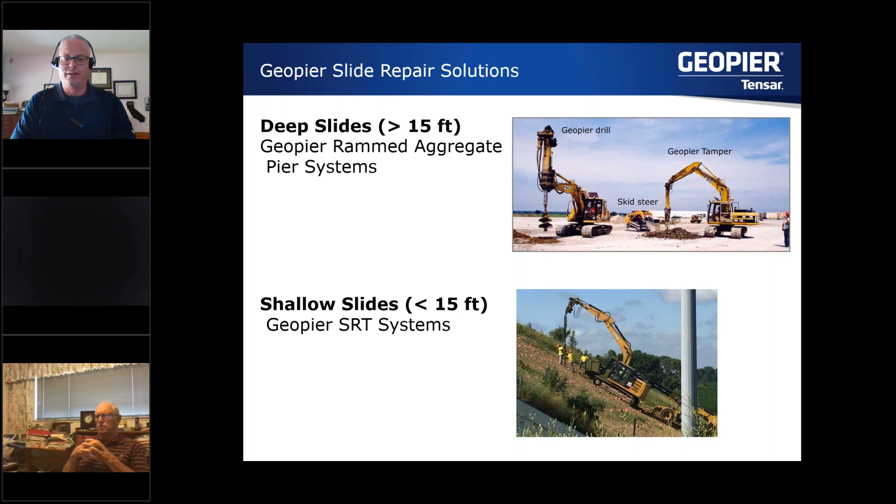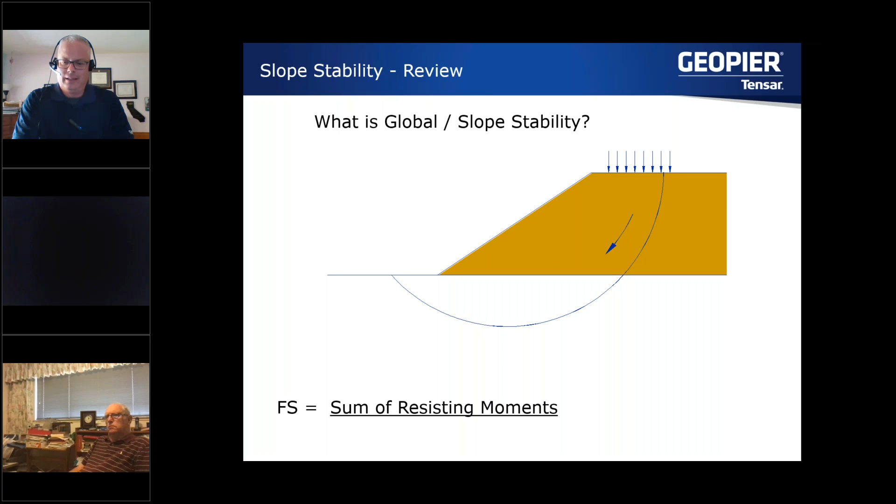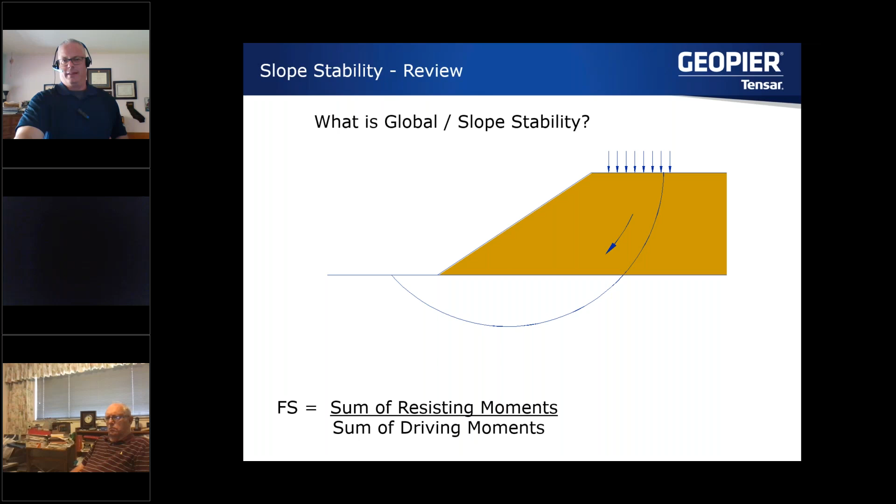So let's start with the conventional RAP technology for slope improvement. Just a refresher for those of you not practicing in geotech, what is global or slope stability? We have some driving forces driving the slope down in a deep-seated or global instability. The resisting moments divided by the driving moments is what is defined as the factor of safety of slope stability. Excuse me, I had that reversed initially, but this is the general concept and the problem.

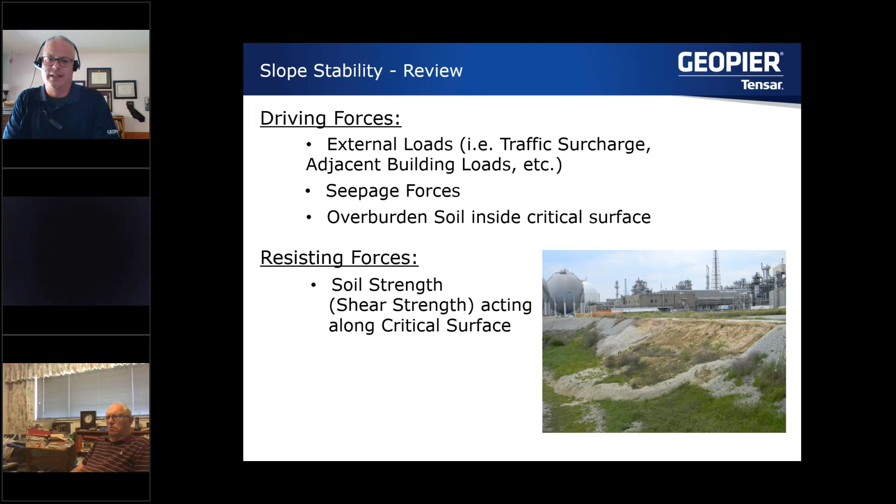So driving forces can be external load, surcharges to the top of a slope, seepage forces with water, overburden soil inside the critical surface. So the driving forces are the slices on the top side of the slope pushing down on the resisting slices of soil on the bottom side of the slope. And for resistance, unless you have some kind of mechanical connection, say a tieback wall or some connection to the other side of the sliding surface, it's simply the shear strength of the soils on the resisting side, the toe of the slope.

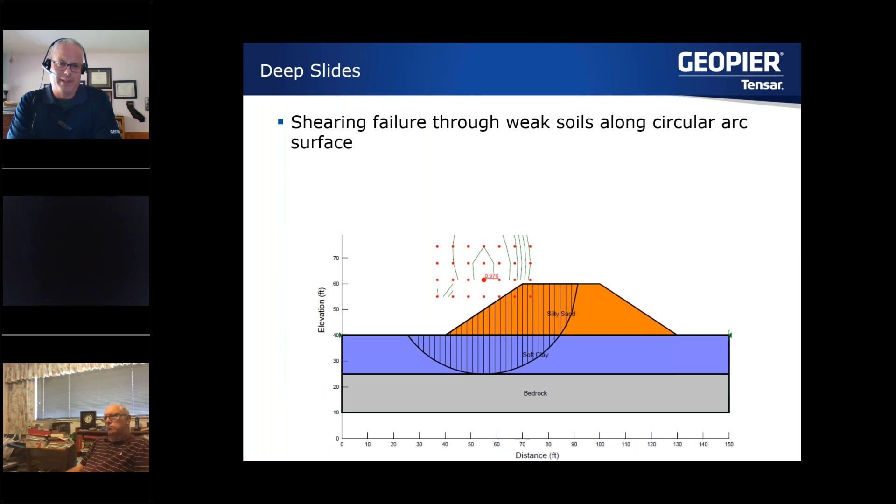So this is a typical SLOPE/W model, what it might look like. Shearing failure, you see the slices there I mentioned. On the right side would be the driving side, the resisting side on the left. And if we put in a rammed aggregate pier, the RAP area at the toe of the slope to help resist the slices from above from sliding down, this is what the model would look like.

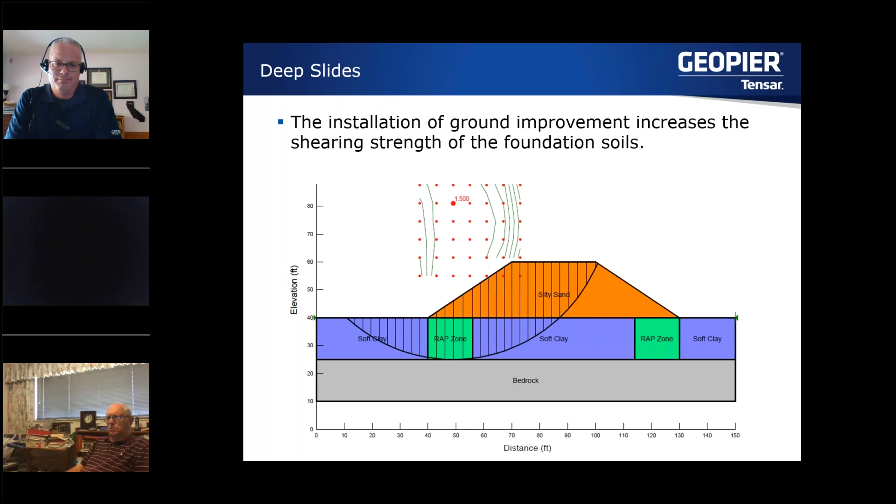So by putting the RAPs in, we're increasing that shear strength and creating a composite shear strength. The rammed aggregate piers would typically have a phi value of 50 degrees and a 0 cohesion intercept. Again, for the non-geotechs, there are two types of strength parameters typically that we look at for slope stability projects: the phi angle of the soil, which is the internal friction angle, and the cohesion, which is how sticky that soil is. So you add those together and you get your composite envelope.

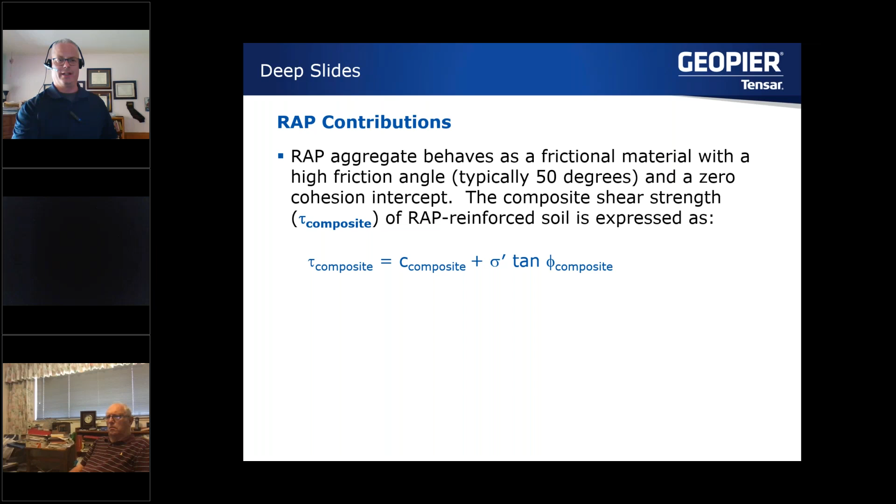So say this is a constructed embankment with some soft foundation soils, we can come in and put our piers in if the modeling shows that the factor of safety is insufficient. So really this becomes a weighted average of the matrix soils of the foundation material and the strength of the RAPs. What's important to understand here is R sub A, which is the area replacement ratio. It's basically just the percent area of the piers compared to the whole system, the piers divided by the footprint of the sliding area.

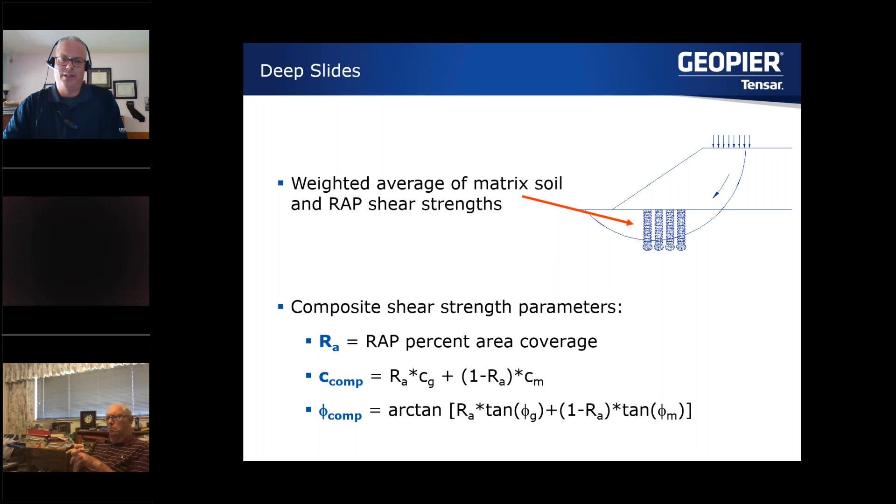And then we're going to look at the composite C, the cohesion we talked about, and just take the area replacement ratio and take the weighted average. Same thing for the phi angle. So for an example here, if we took an area replacement ratio of say 20%, that means of all the area that we're supporting in the RAP zone in the model, 20% of that in plan view is going to be a rammed aggregate pier.

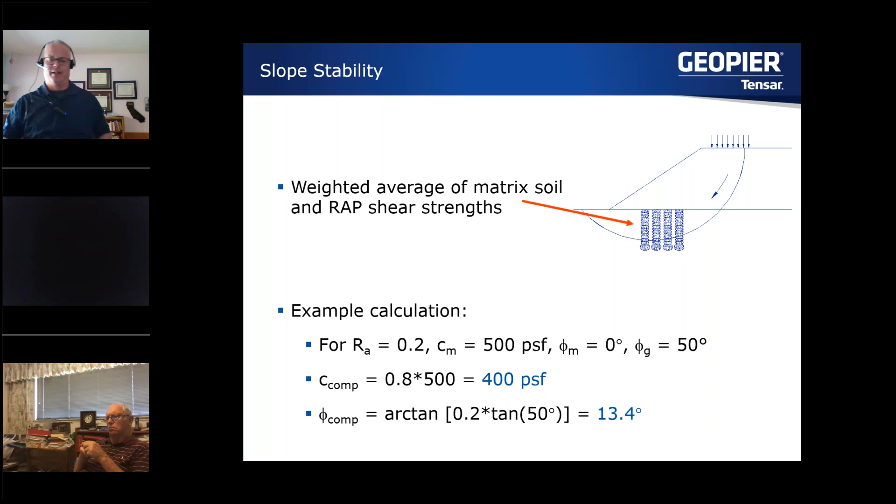The matrix soil, C sub M, is 500 PSF. And let's say the phi angle of the clay is 0, and the phi angle, as said before, is 50 degrees for the Geopier. Taking that, the composite cohesion is going to drop down a little bit, but we're going to pump up the phi angle to 13.4 from 0. And that's a huge benefit, for those of you that have run models out there, I think you would agree. So that's going to stabilize the slope and increase the factor of safety.

But there's something else going on here: stress concentrations for the stiff rammed aggregate pier elements. So if we had a confining layer, a stiff layer or bedrock we were tying our piers into, in other words, the global stability would not, I guess a better way to put this, the critical slip plane in a soft soil that goes down 100 feet and our piers are say 30 feet, how we're going to be improving the factor of safety is pushing that slip plane deeper. So Mother Nature has a way of finding the path of least resistance.

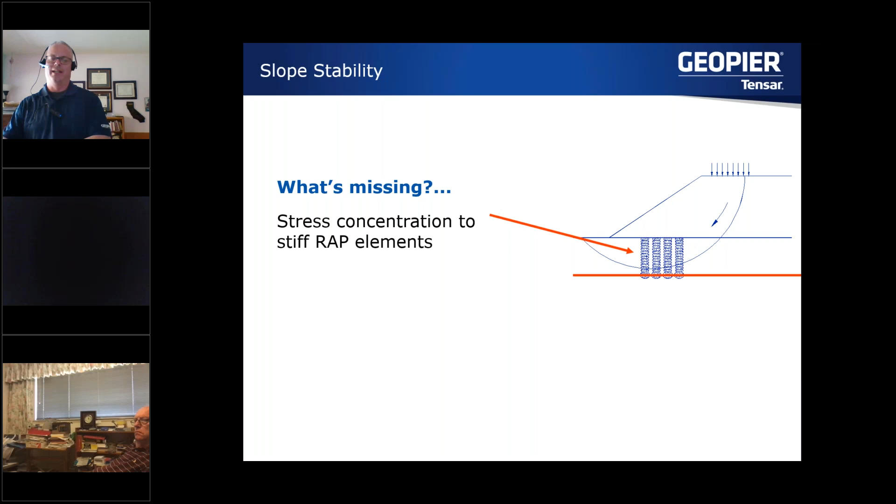Well, if we're confined by that and our piers can tie into a dense layer or bedrock, then what's going to happen is our structural engineering friends would tell us that stiffer elements tend to attract more stress. And that's exactly the concept that is happening here. So should this be our condition, we can actually account for that with an R sub S. Now that's the ratio of the stiffness of the pier to the soil.

Now for a completely rigid element, like in a rigid inclusion, conceivably the stiffness ratio is the ratio of the stiffness of the element to the stiffness of the matrix soil. But this is not that case. What we have here is a flexible condition, so really the R sub S values are limited to 1 to 5. Whereas if it were just the ratio of the element to the matrix soil, it would be anywhere from 10 to 40 or 10 to 50. So that's important. It requires a little engineering judgment, especially as it relates to the profile.

There's a lot of alphabet here, but the important thing to recognize is this is just a weighted average, as I said before, with the stiffness ratio weighted into each element. So just for an example, back to area replacement of 20% and R sub S value of 3, using the same matrix soils with no rammed aggregate pier at all, we're going to have a C of 500 and a phi of 0. That's not going to be the strongest slope. Neglecting stress concentrations, we're going to be at 400 and 13.4 as previously stated.

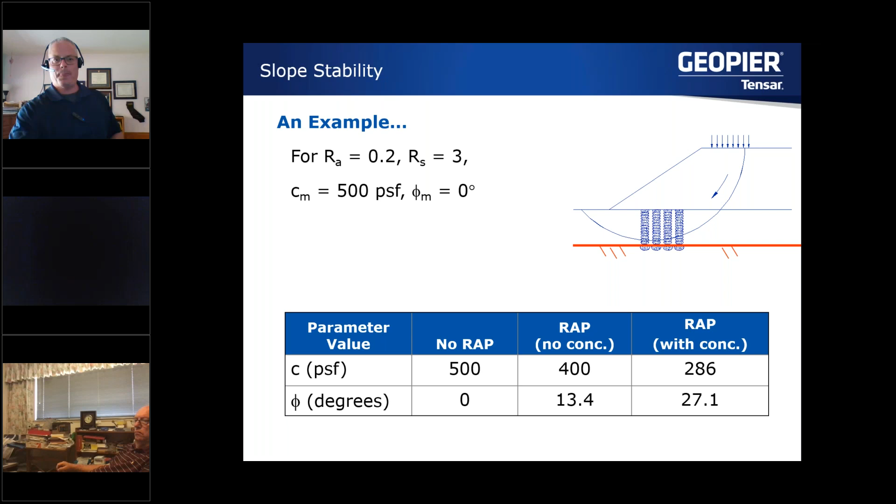So here's an example. How are we doing on time here? It looks like we're doing fine.

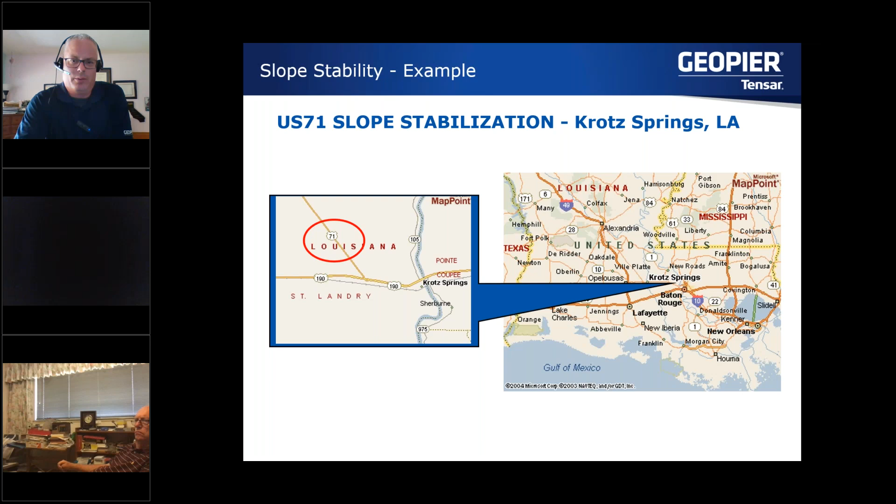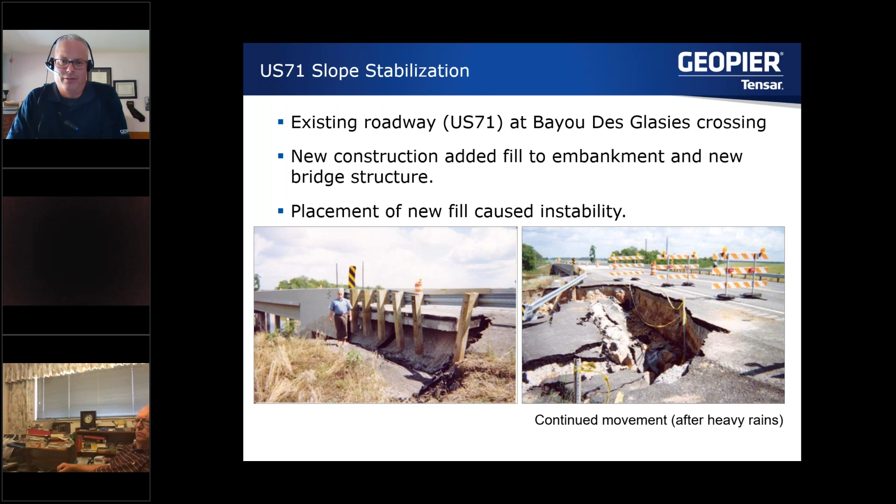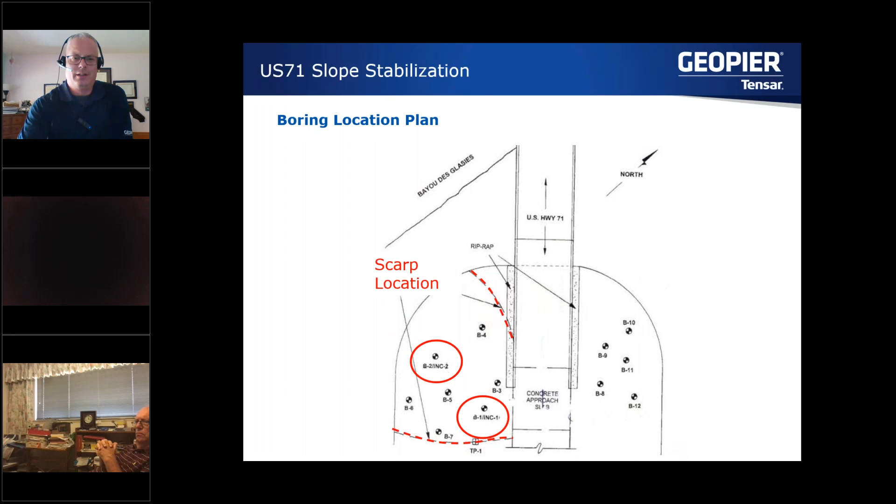In Louisiana, Krotz Springs, US 71 slope stabilization. Here's a project out in the bayou where they added some fill on an embankment, and it destabilized the slope as they decided to raise grade for this bridge crossing. Here's a look at where the slope was failing towards the watershed there. You can see where that scarp was intersecting the road as it degraded in the previous picture. And notice the 2 inclinometers there.

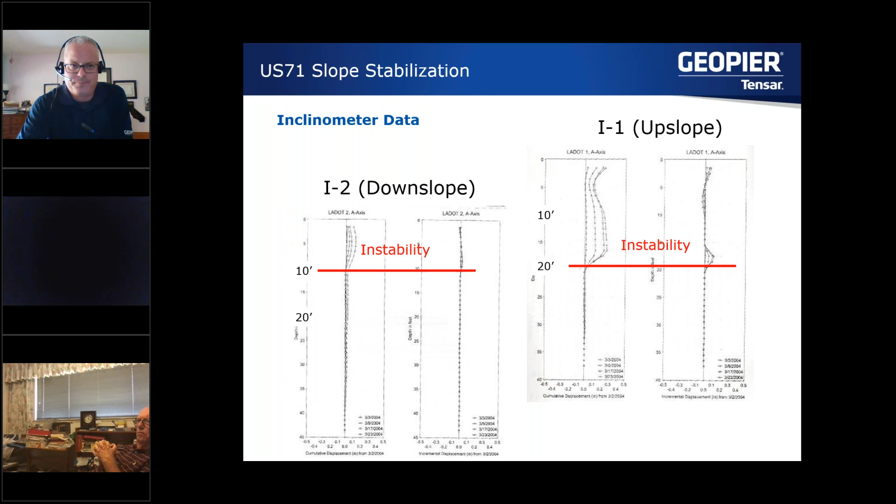So here's the borings, the profile. Let's see the clay fill they added, and the instability of the upslope and downslope. So a classic movement there. So like any slope stability problem, typically you're going to start with back calculating the strength parameters to get to a factor of safety of 1 if it's a failed slope or on the verge of failing. And that's what we did here, as you can see.

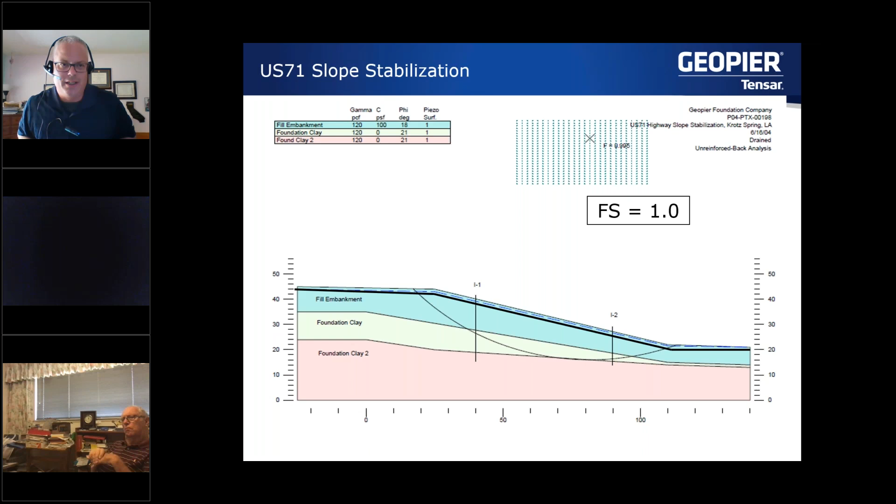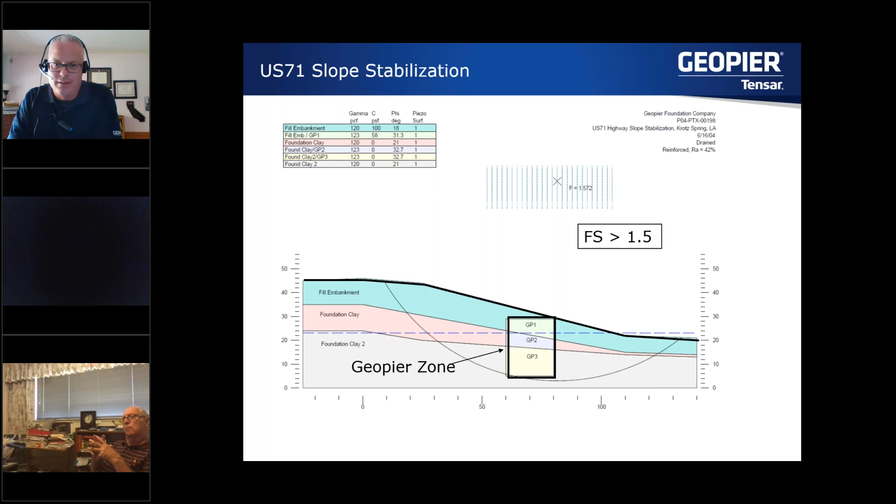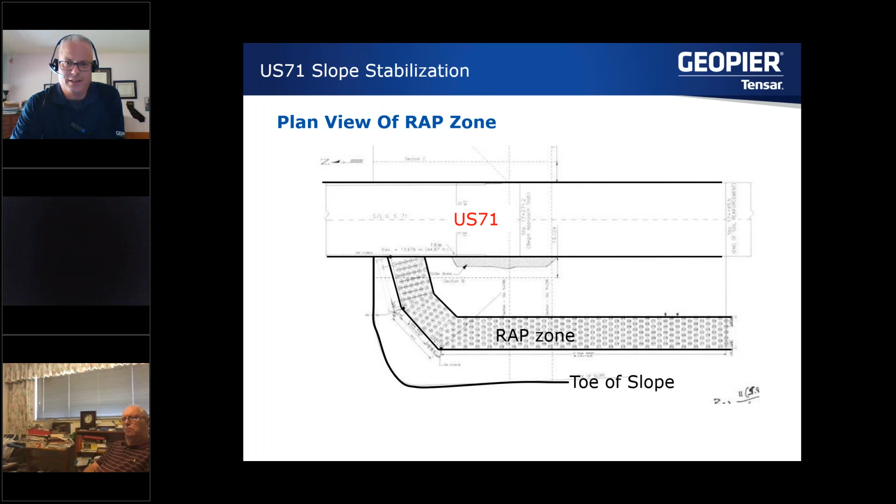So nothing new. And then we added the RAP area around the shoulder at the toe of that slope. And you can see the parameters up top using the formulas and the analysis we just went through, and we were able to bump this up to almost a 1.6, but greater than a 1.5. Here's what the plan looks like for all the RAPs that went in. You can see the toe of the slope there, the creek and the bridge. We just brought that around and increased the resisting moment of the system to increase that factor of safety.

And this is just a quick video here to help illustrate some of the technology that we used here.

But whoa, that's loud. Sorry about that. I don't know if I blasted everyone's ears.

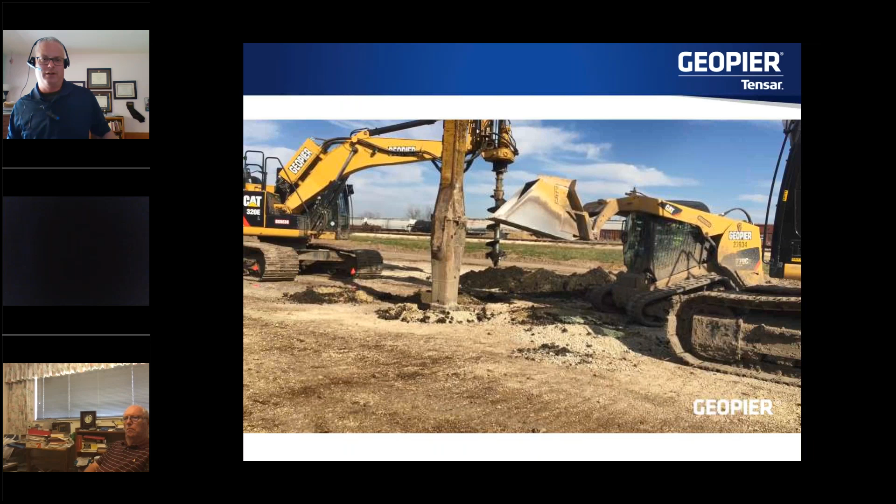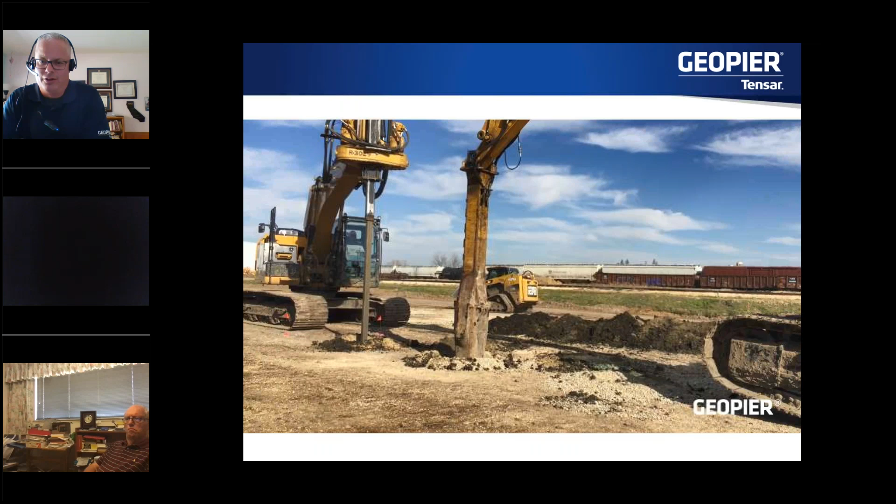This is showing just a classic drill and fill technique that we developed. We have a lot more tools than this for whatever application it is; settlement control is by far the main reason people use Geopiers. But for this talk, this is the technology used to increase the stiffness of the soils at the toe of the slope, and again, increasing those moments. You notice the excavator rolls back on its heel, and that's to get more reaction.

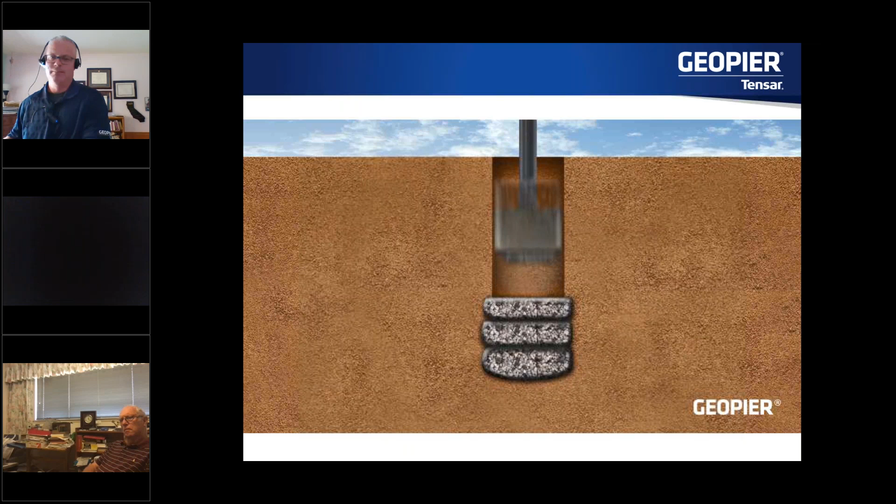But the concept is to extract soil from a hole here and put in different lifts. We're going to punch in a bottom bulb here to get a working platform, usually an open graded material in the bottom, and then well graded all the way up to directly beneath the foundations or stiffening the slope. That's the general concept.

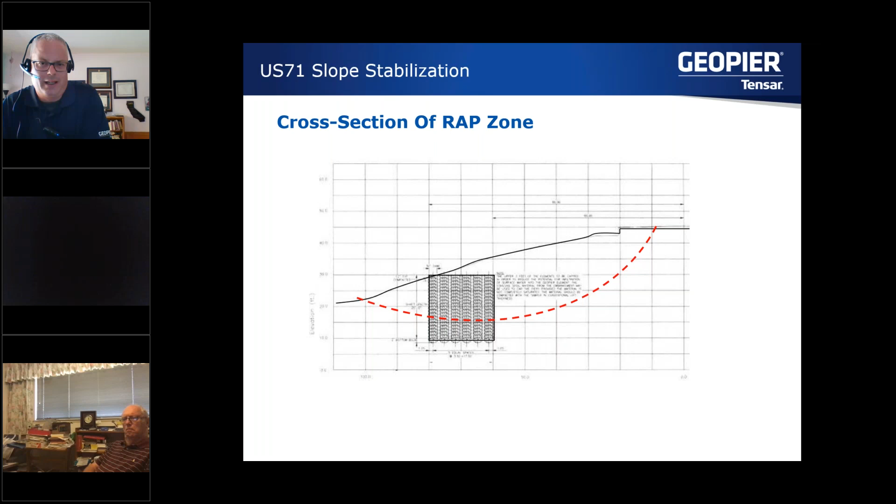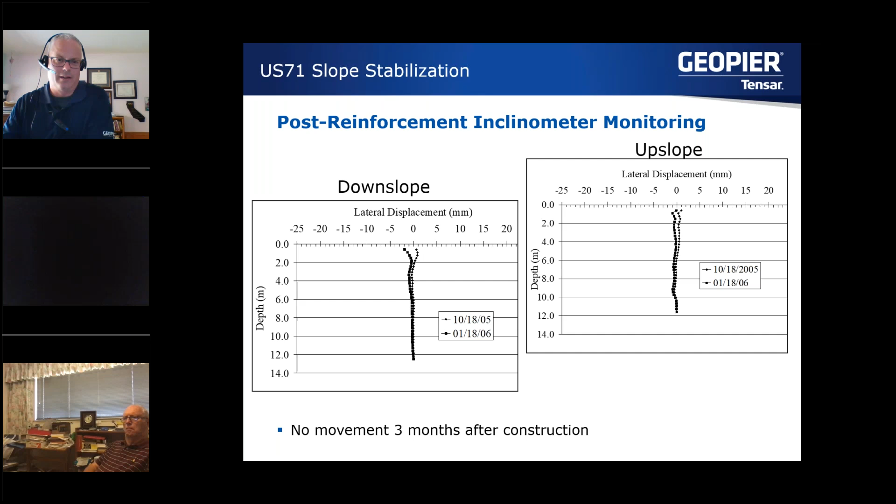So again, rammed aggregate piers are typically used for settlement control, but we can help you out with the deeper slides. Like I said, I think the mechanics are pretty clear on that.

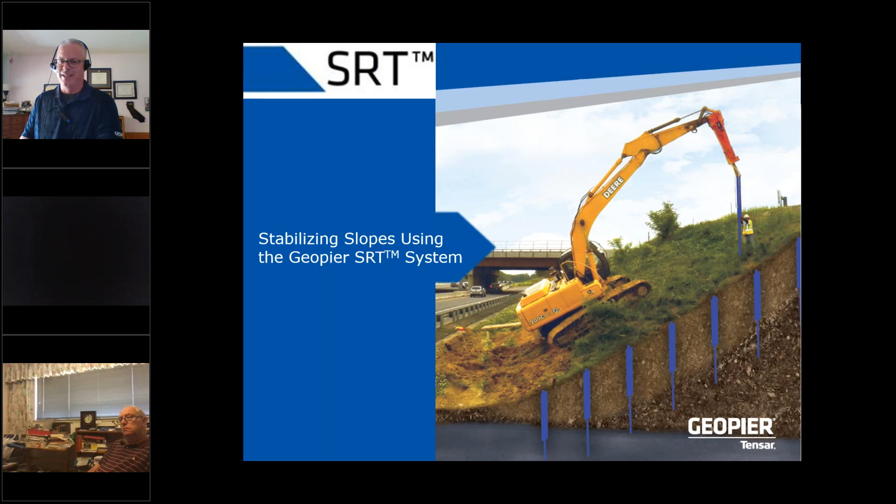All right, so SRT, we're going to move into the slope reinforcement technology. A lot of the challenges that we've been able to use with SRT is it's a surgical approach, if you will. There's a lower environmental impact because it's not a regrade situation. We're moving less earth. We can get on some fairly steep slopes where other equipment may not be able to, again, without massive earth moving and perhaps some retaining walls for the safety of construction, or tieback walls. The cost is typically quite reasonable in that regard.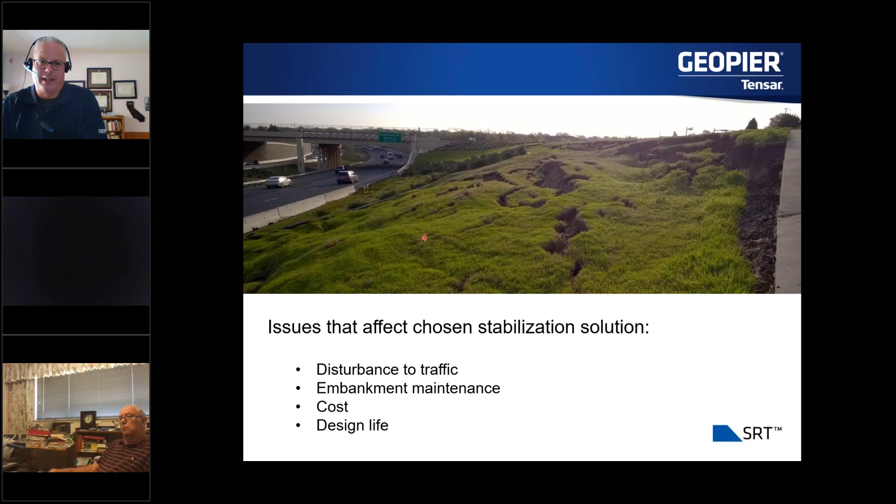Maybe not as reasonable as just pushing the soil up the hill again, but that's just kind of putting a band-aid on a slope stability project. It becomes an annual maintenance issue. So yeah, it reduces the amount of future maintenance on a particular slope as well. So all these are things where an SRT system can help you and your owners.

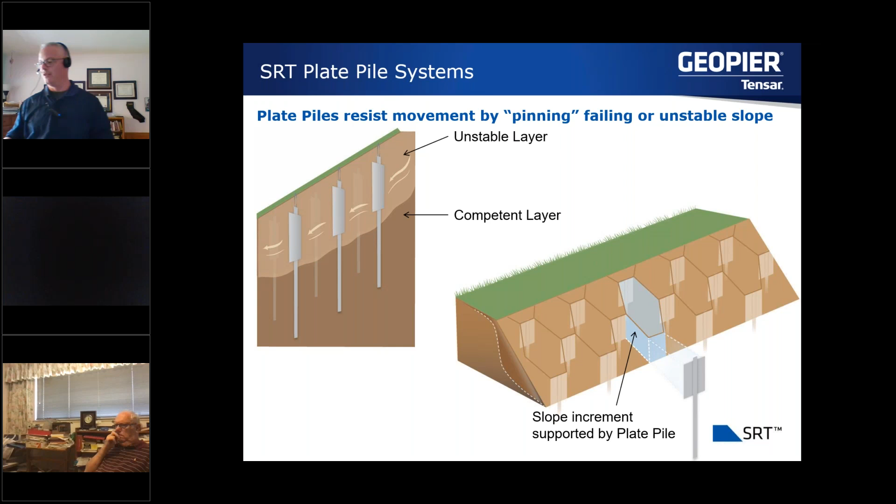This is the general concept. You can see that we're going to take advantage of soil arching. There in the lower right corner, each row is staggered about 4 feet on center to arch between the plate piles ahead of it and below it, and or upslope from it. And the idea is to drag up some of that shear strength from beneath the slip plane to reinforce the soils above. So it's a mechanical interlock system. I wouldn't consider this necessarily ground improvement as much as ground reinforcement. We're just stitching this thing together.

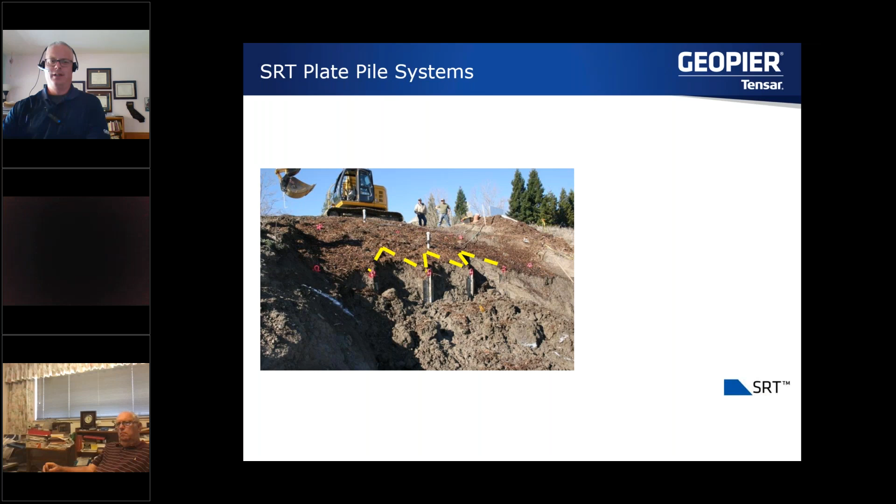So this was developed, the research for it was laid out at UC Berkeley. Richard Short was a big part of that. He got the original patent on this prior to GeoPier purchasing it from him. And he did a lot of great work with UC Berkeley and their research students to kind of hash all this out and come up to where we are at this point.

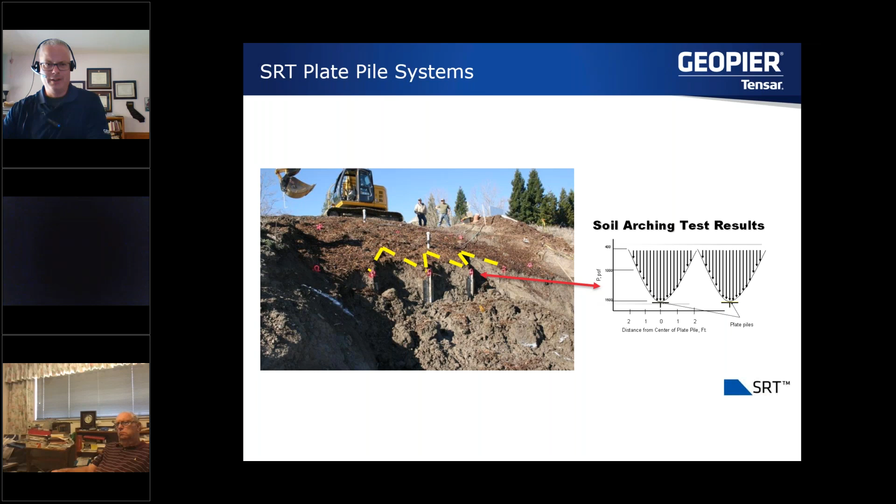But this is a great example. You can see here the soil arching I had mentioned between the plate piles being 4 feet apart there, and you can see where the slope had failed beneath the lowest row of plate piles. So it's a great illustration. And also here, they ran 4,000 gallons of water in along a slip plane, and the slope worked fine. Once they extracted the plate piles, you see the result there at the bottom.

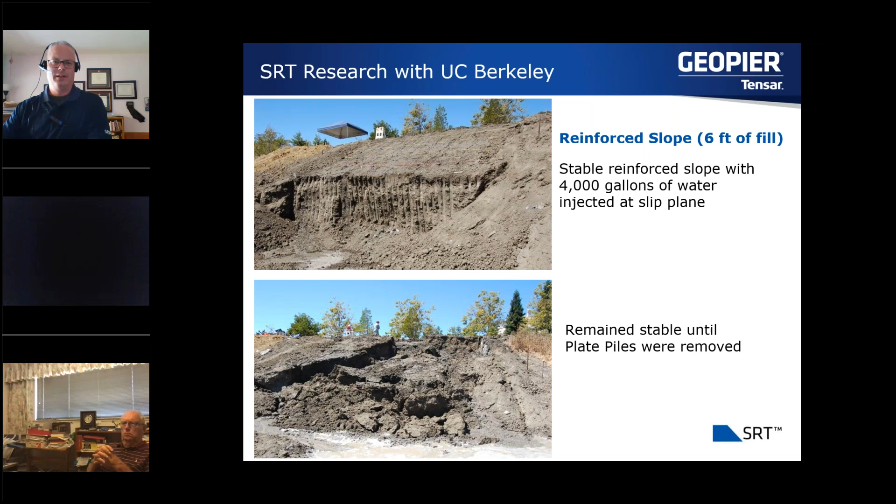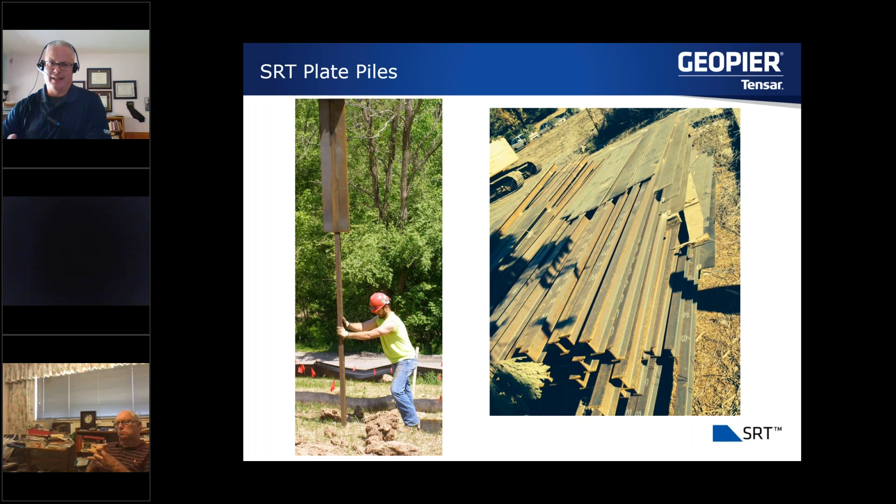This is what they look like. They're basically large speed signs, you might say. What you're not seeing there in the left picture is that plate pile is actually suspended with an excavator. So yeah, safety is always taken seriously, of course. That guy's not holding up all that steel.

Typically, any slope with a slip plane with some organics, maybe even a flatter than 3-to-1 slope, becomes unstable, and we can certainly help with that. But usually a 3-to-1 slope is pretty stable.

So for this slide, it's 3-to-1 to 1-to-1, so about 45 degrees. We've even done some slopes a little steeper than 1-to-1. You have to start getting a little tricky with yo-yoing equipment off the side of the slope. We can certainly do that, but it slows us down a bit.

As I mentioned, slide thicknesses up to about 15 feet. What we're looking for is to get these plate piles into a stronger layer below. So we're going to do that.

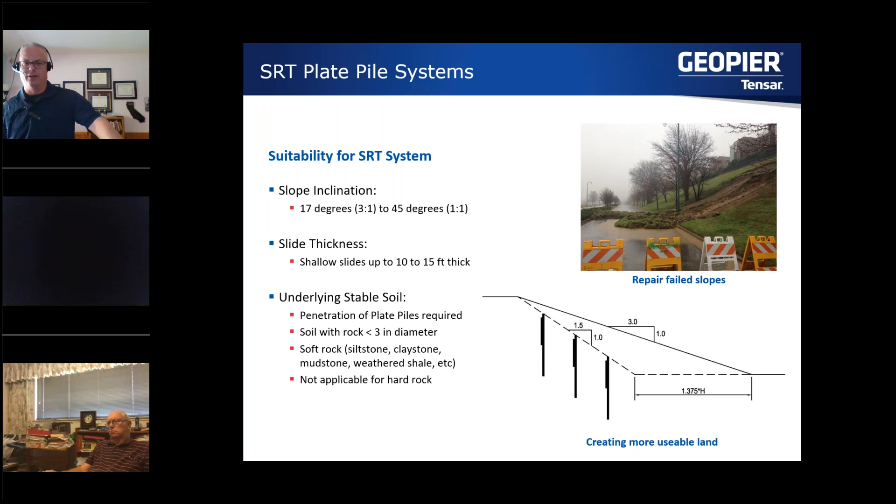Here's the beauty of it for the civil designers out there: all this extra flat space to work with. Just taking a 3-to-1 slope, if you were to do the trigonometry, you'd see that you pick up 1.375 times the height of the slope to go from a 3-to-1 to a 1.5-to-1. So depending on the height of the slope, that could be significant savings and creation of usable space.

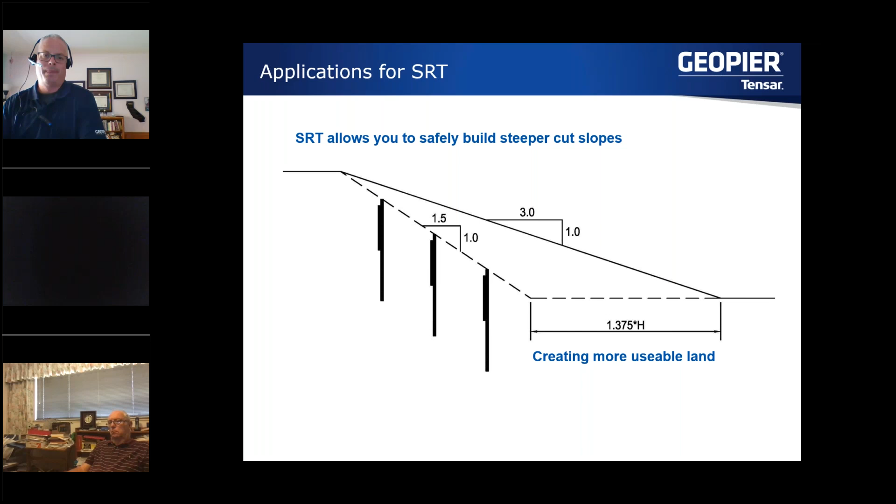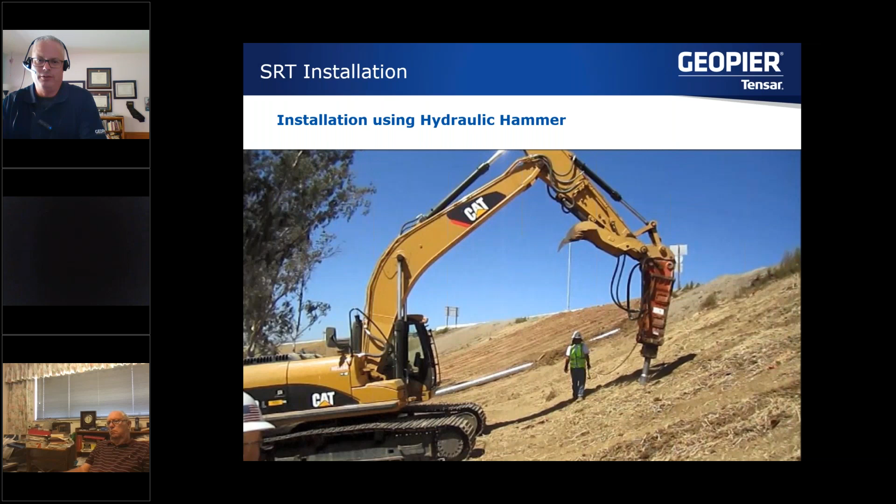Here's what it looks like going in. We can use a hydraulic hammer—they tap in pretty easily. We've done quite a few projects where we're throwing in lots of plate piles in a day, which is a major schedule savings for a project too. And this is using the vibratory.

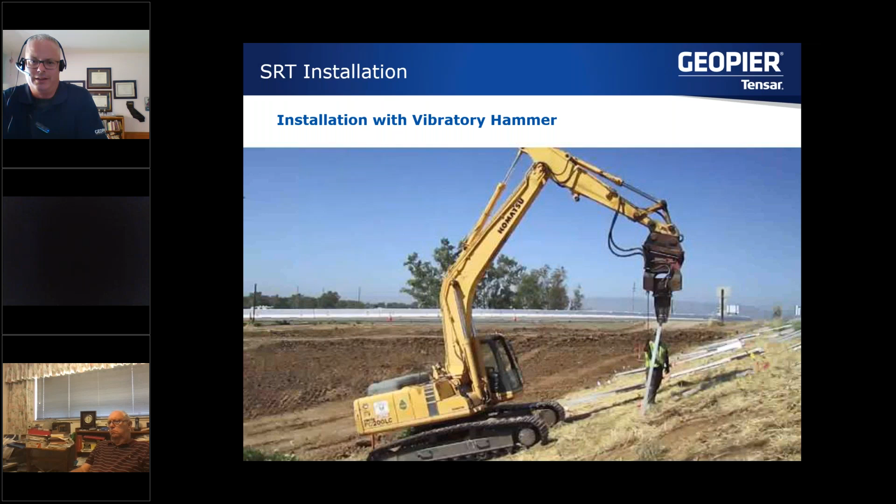So how do we get these things in the ground for your project? That's the big question. If this is going to be a technology that can help you, there's a couple different ways we can bring these to you. One is, depending on the nature of the project and the personnel around it, a general contractor or a maintenance crew can install these.

That's typically going to be for less than 10 feet and a simple geometry, so no compound or three-dimensional analysis. What we would end up doing is going to our tables and coming up with a slightly conservative design to get these to provide to your owner, to you, and they can put these in directly.

Or there's a design build process where we run through an iterative approach through L-pile and slope W or slide—some kind of slope stability program—and we install through one of our pre-approved installers. So a couple different ways to go here, depending on whatever's easiest for the owner.

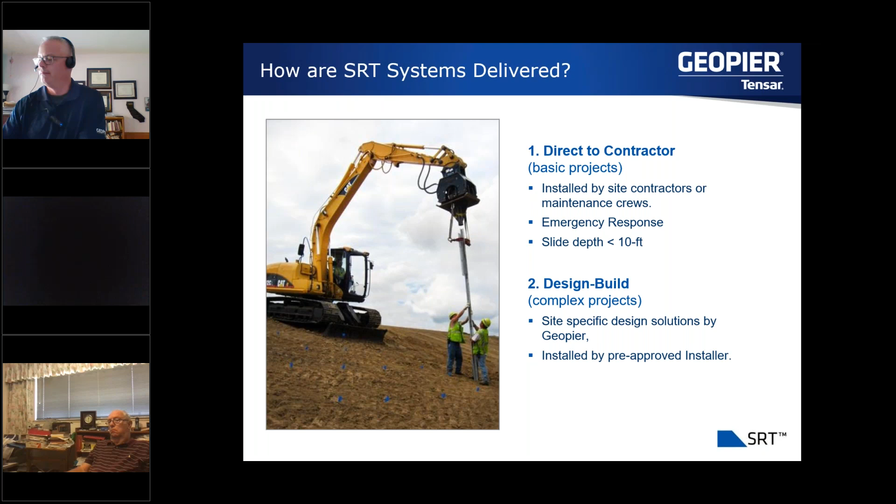For the direct channel, like I said, we would just need some information on the project: slip plane, soil parameters, geometry. From there we could generate a design and provide those shop drawings to you for construction, installed by a general contractor or maintenance crew.

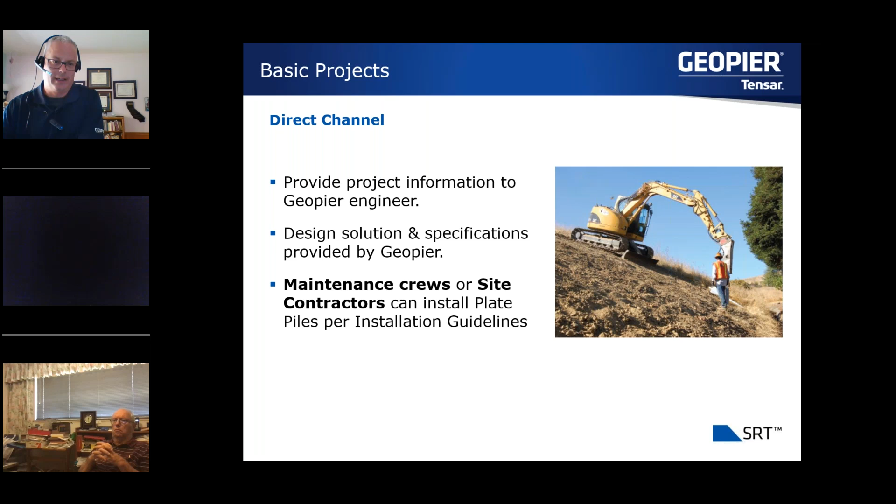If we look at the complex projects, this is our approach and the engineering behind the plate pile. We're going to look at a limit equilibrium analysis, just as we would in any other. We're going to back calculate along with the geotech on the project the parameters. We're going to go to those same tables and come up with a starting point for plate pile length, embedment, and other dimensions.

Then we're going to go to L-pile. L-pile, for those of you that aren't structural engineers or geotechs, is a lateral pile analysis by Ensoft. We're going to deflect these piles, assess that the maximum bending moment hasn't been exceeded, and then come up with the shear resistance.

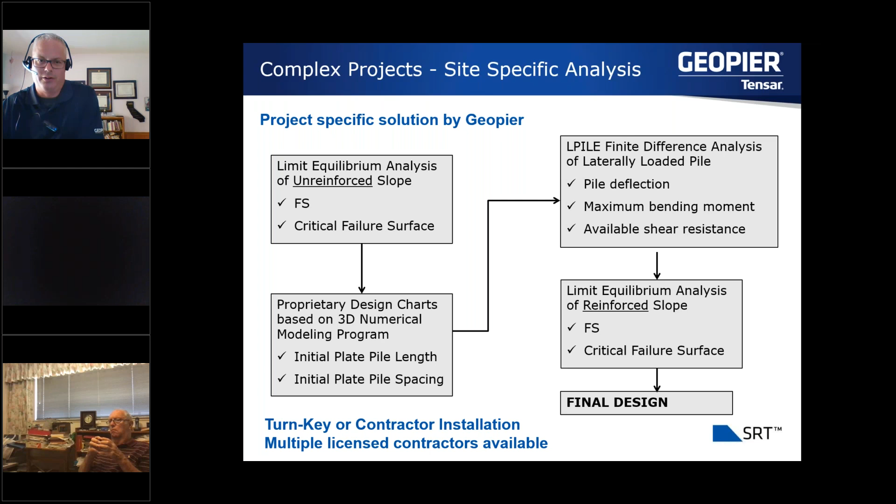Now that's the available shear resistance—that's key, we'll talk about that in a second. Then we'll go back to our limit equilibrium analysis, our slope W or slide, insert our elements, check our factor of safety, and see where we're at if that satisfies. If it doesn't, then we'll go deeper or tighten the spacing just to get to where we want. So this is the iterative approach for design on these.

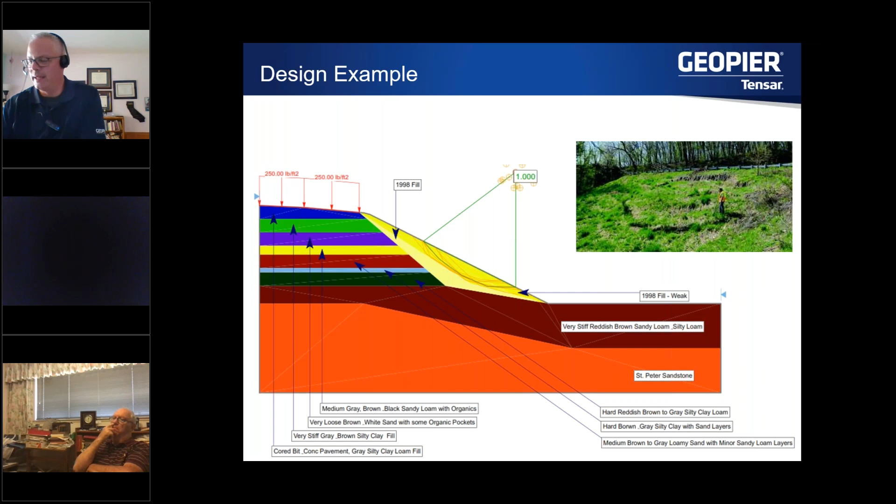As an example, here's a project. You can see the instability in the picture on the upper right there. So a factor of safety of 1, some fill that was put in just before the year 2000. We came in, looked at the site, came up with this model, and worked with the geotech of record to pull this together.

And took our plate pile section that we talked about and put it into L-pile. We have that transition zone about 6 inches above and below the selected slide plane, or the determined slide plane, and we're going to deflect that thing over about 1 inch.

So it doesn't have to be 1 inch but that's generally what works for a typical slide. If we had a paved road, we wouldn't want to go any more than that. We might actually tighten it up some just to keep the soil from moving. But if we were trying to hold back a slope, say above a road area, it would be fine for the soil to deflect a little bit more.

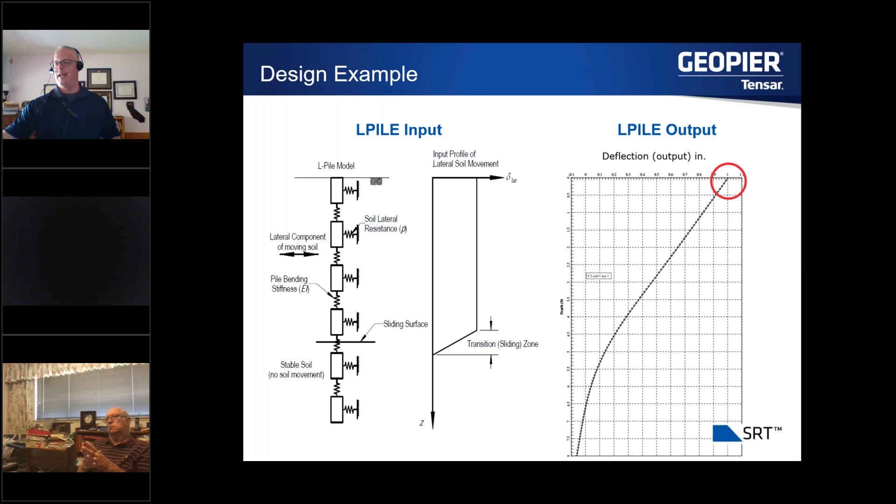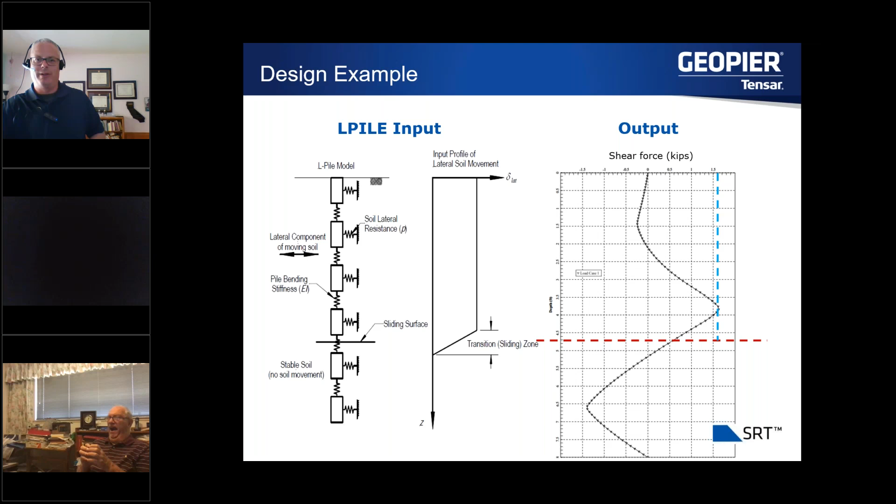So the takeaway here is we're going to deflect this pile, and at that deflection, what is the available shear at that point? Because obviously the steel is going to put out quite a bit of shear. In this case, we're getting about 1.6 kips with that deflection and geometry. So that's what we get to apply to every plate pile.

And we're going to check that. In this case, the ultimate shear of the plate pile is 83, so we're typically never going to shear that. But the 1.6 we can apply to every plate pile, and the arching in the staggered array on the hillside brings that shear back up to reinforce the sliding soils. Hopefully that makes sense to everybody.

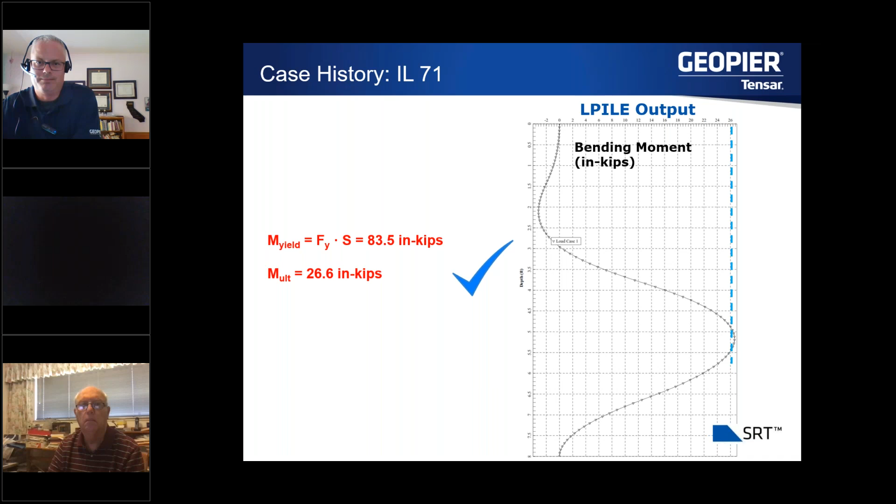We'll check the bending moment. Good there. So again, for that deflection and geometry, looks like we're going to generate 26 kips of bending, well below the yield of the section. So now back to our model here. We'll put in these stiff elements, and the safety factor came up to, again, almost 1.6, so above a 1.5.

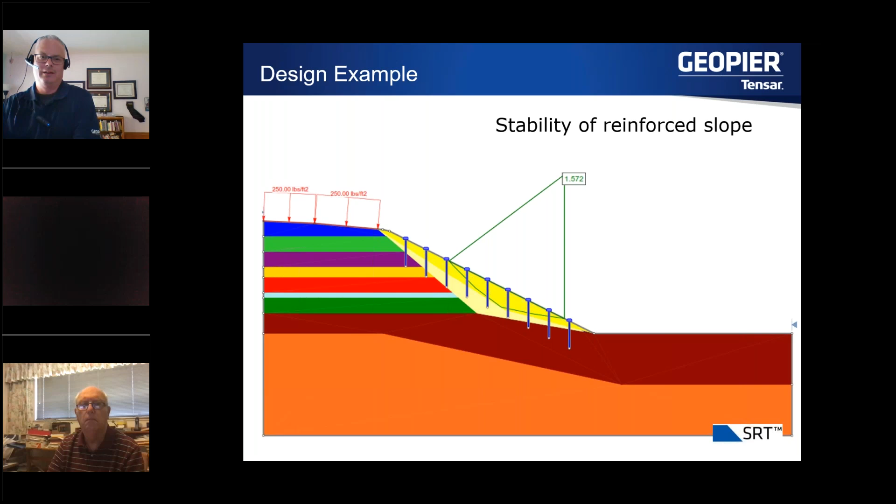So I think we have a little bit of time here, so I could bounce around on these, but I think I'll just go through some examples.

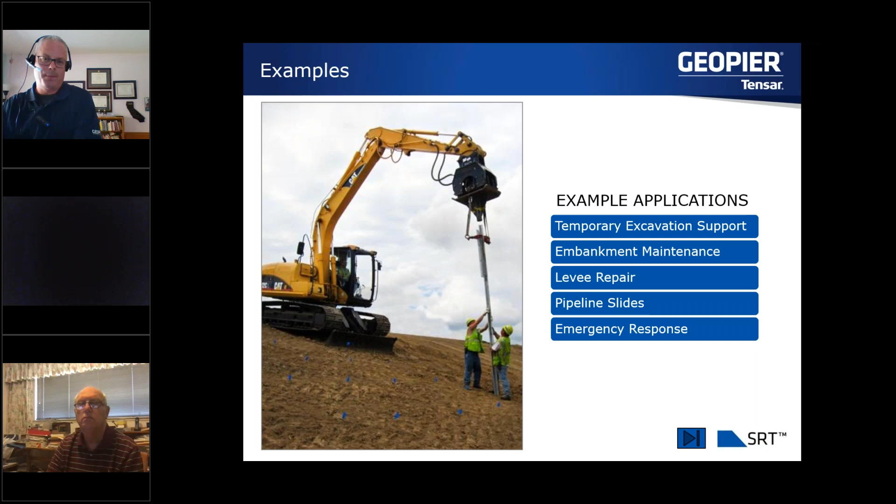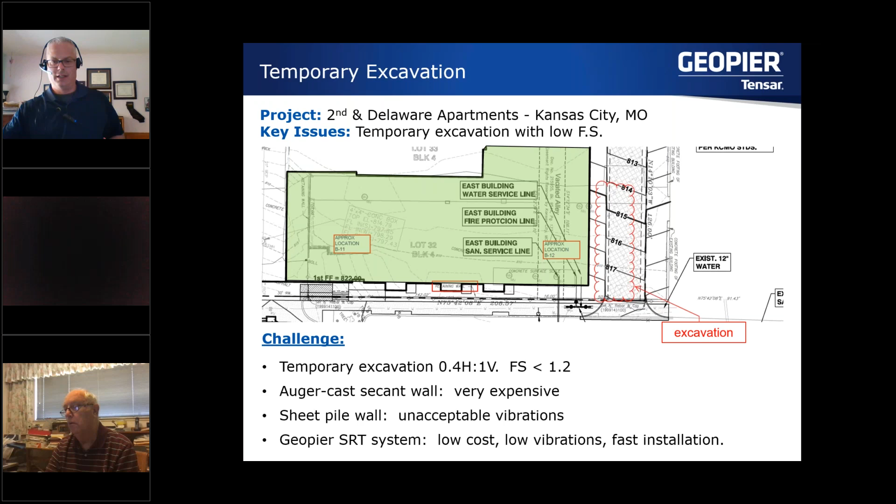So here is a temporary excavation. Now typically plate piles are used for permanent solutions, but in this case we were able to come in and use them on a 0.4 to 1, so really steep slope, and get to a factor of safety of 1.2, which is fine typically for a construction situation. The alternative was an auger cast secant wall, which was quite pricey. Vibrations were a problem for the sheet pile wall, and Geopier was able to provide the SRT for low vibrations and fast installation. So you can see the slope there, pretty steep.

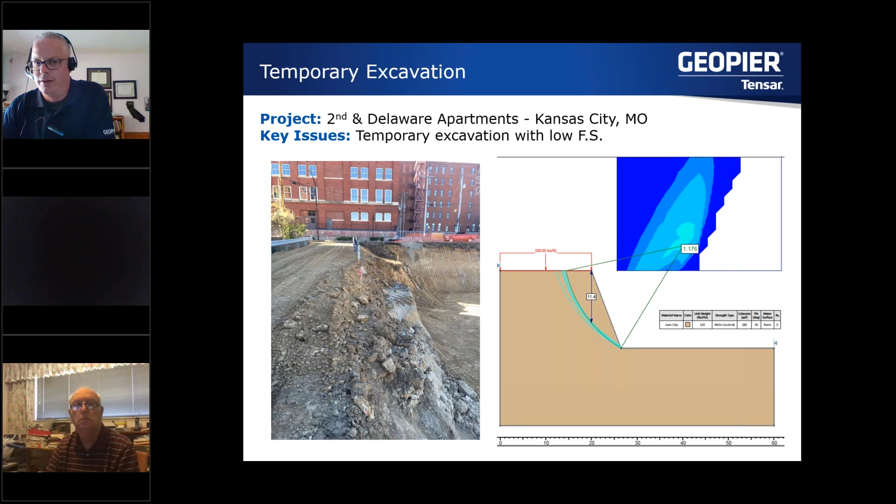That was the model, and we went in and put these in, in Missouri. And as soon as we got these things in, we ended up with like a 200-year storm, and it just hit the site with a deluge. And you can see, with the surcharge load, we got the plate piles in.

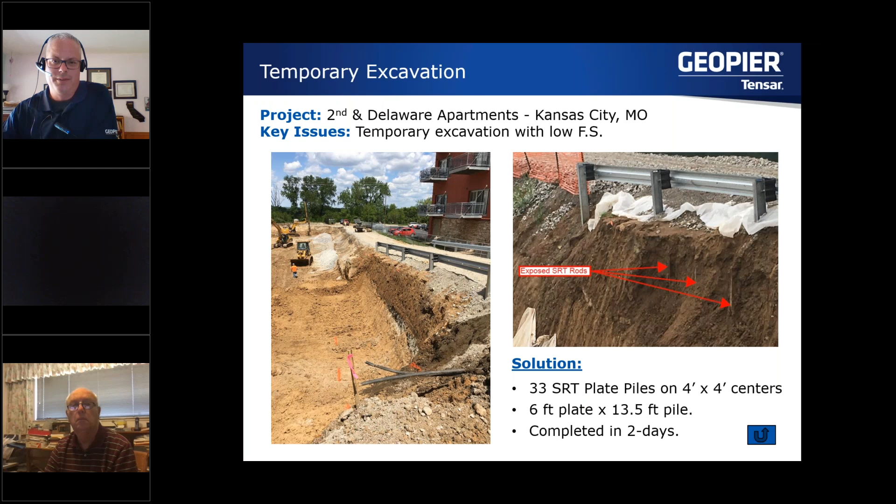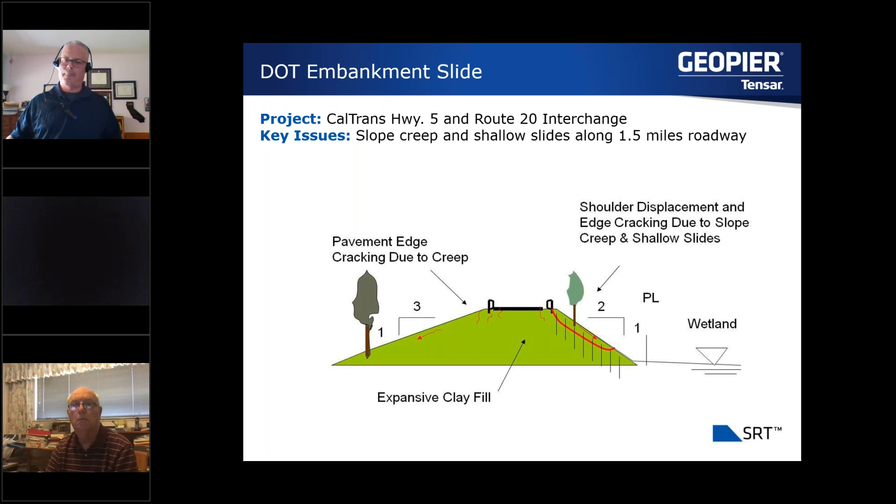The need for the job was geometry constraints. Rather than the standard 3-to-1 DOT slope, due to wetlands they had to steepen that up to a 2-to-1 on the right side of the slope. So we came in and installed 9,000 plate piles in 70 days. As I said, these things go in pretty quickly, 6 to 10 foot lengths, and saved about $3 million on the project, along about 1.5 miles of roadway.

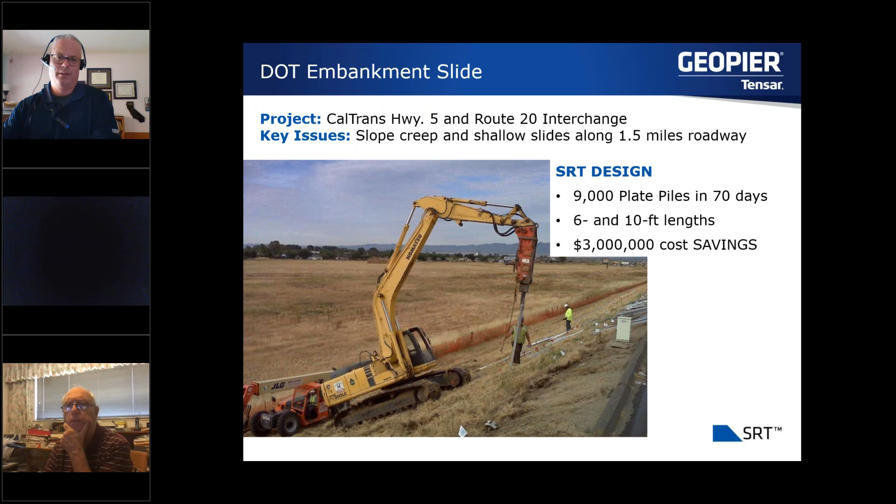And that's what it looked like sometime after.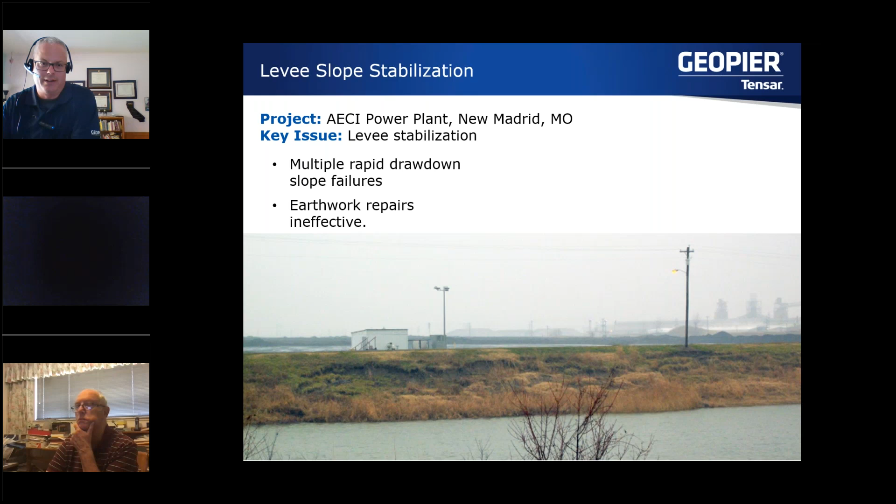Here's a power plant in New Madrid, Missouri. Levee stabilization there. You can see they were having some maintenance issues keeping this levee in spec with the geometry. The power plant was involved, so it really wasn't an option to have this thing breach. 1,500 plate piles in 12 days, saved about $1 million on that compared to the alternative.

And it's a robust solution. It's a fix that's going to be there. You're not going to be out there with a scraper or grader tidying this thing up every year. So we're going to pin things back mechanically. Once the vegetation grows over the top, it's in place and set. And I mentioned vegetation - we're going to drive these things in 6 to 12 inches below the ground surface, so you don't have to worry about people stepping on them or cutting their feet on them. Once they're in place, you don't even know they're there.

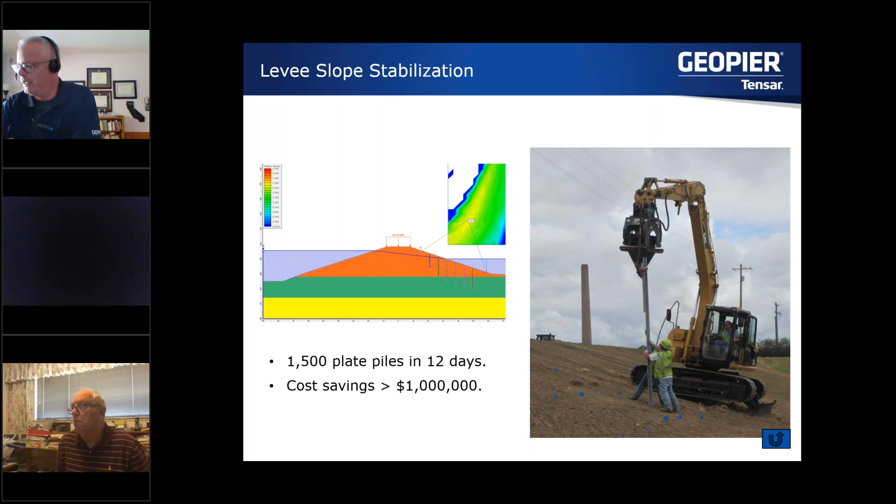So here's a project, and this is actually fairly common for us to use SRT for: sliding or creeping slopes around pipelines. In this particular job, we were able to come in - they were having all kinds of maintenance issues with the pipeline because of the moving slope. This is in Kentucky, and you can imagine the strain and stress on a pipeline, especially if it's a lifeline, for a creeping slope.

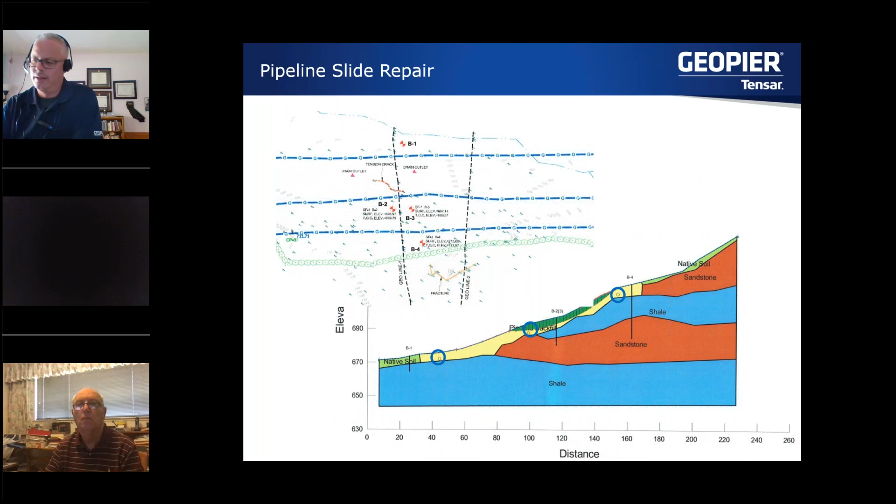They've been fighting this thing for years with just a bunch of regrade. We were able to come in - you can see the 3 pipes there in the profile. We got some plate piles in to hold this thing in place, stitch the slope together, quit moving, and saved on all kinds of maintenance for the utility.

There you can see the layout: 5.5 foot slide depth, 19 rows, 10 foot long plate piles, 4 foot, depending on which tier you're looking at.

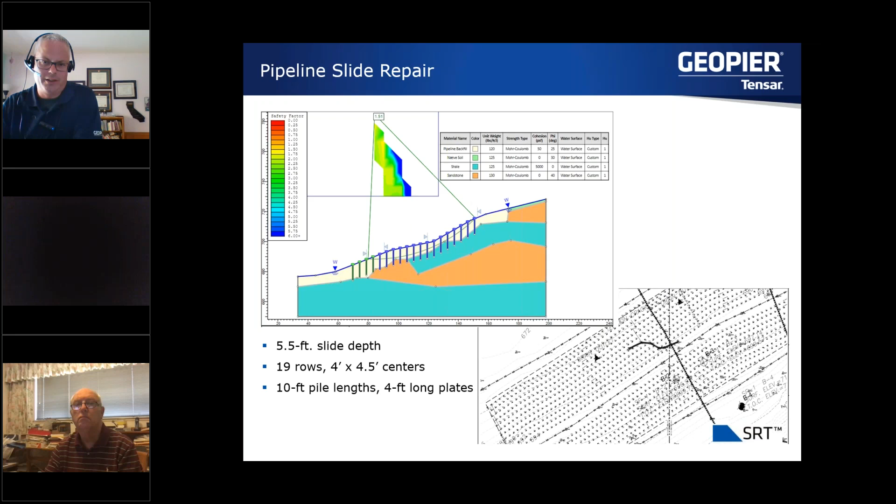Again, the same process that we talked through as far as the design on these things. And there they were going in. I don't know why they tapped them in the way they did, but that's just the way the contractor decided to. He put them partially in and then retapped them.

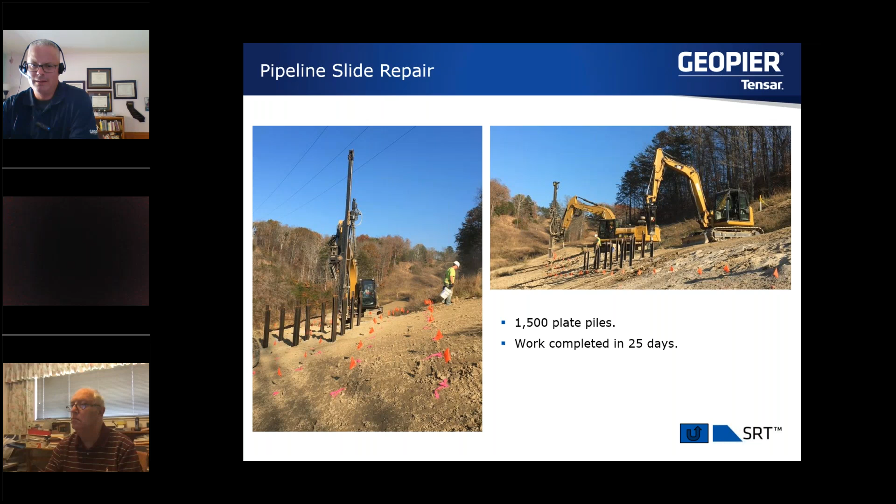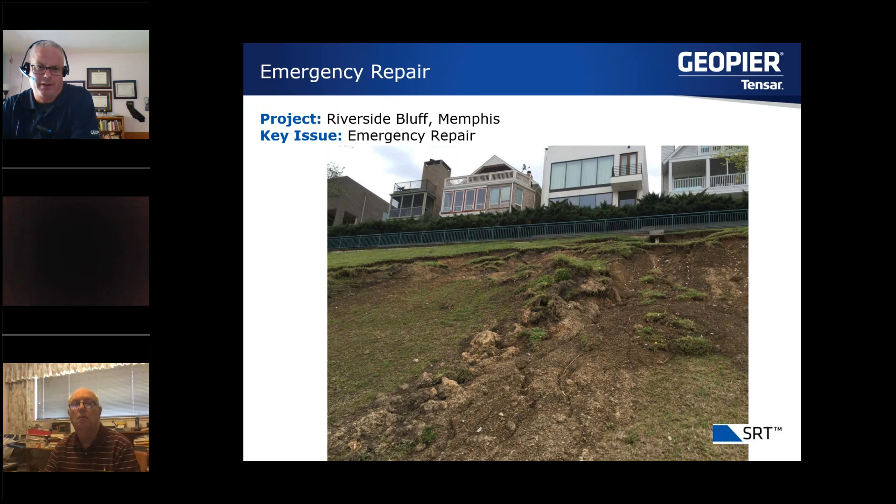All right, here's an emergency repair in Memphis, Tennessee. This is, I think, the only hill in Memphis, as I understand it. We had a situation where this came down after a large rainstorm. They were concerned it took out a little bit of road. It wasn't that big of a deal, or at least it doesn't appear that way to me. But for the only hill in Memphis, they were pretty excited about it - it was on the news. We were out there just a couple days later and got this thing fixed.

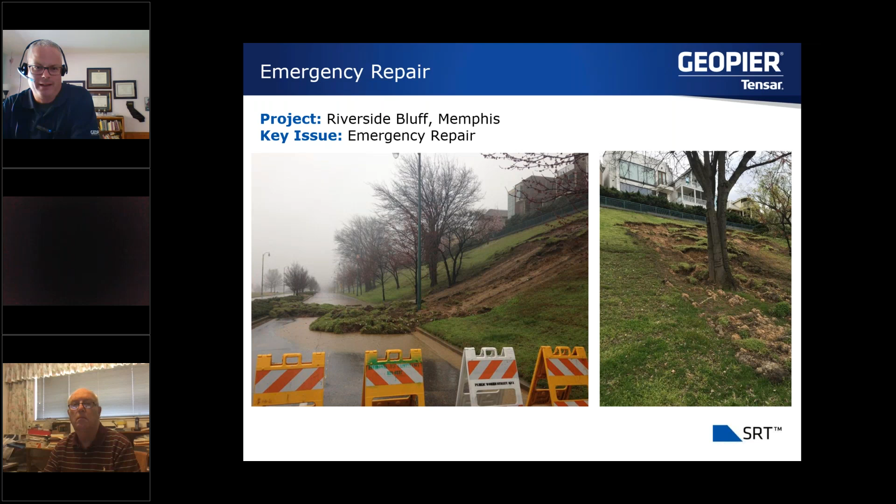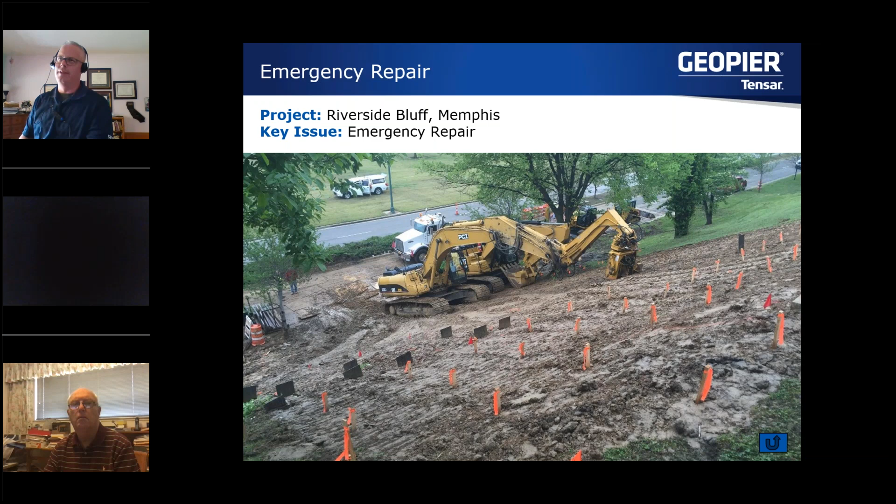Again, we went in and tapped these things in, fixed the problem. One advantage - this is probably a good opportunity to mention - is compaction. The plate piles, the way they operate and the theory behind it, we don't need to meet compaction, as it can be challenging putting sliver fills on a slope. So we put the plate piles in, we get the interaction with the soil, with the initial movement, and everything locks in place. Just track walking the slope is sufficient as far as getting material back into geometry.

So why SRT systems? We've touched upon these mostly along the way. They're fast and economical. They permit more workable area, more flat area for the owner, to help tier some locations on the hillside. They're constructed with, just as you saw there, small to mid-size excavators - so we're not going to come in and blow up the site and scrape it and pull everything down.

It's easy to respond to emergency repairs, so quick response. Minimal site disturbance - here in California, the environmental impact is far less. It can be desirable depending on the project needs. And it's a high confidence engineered solution - it's robust, and it's not just putting the Band-Aid on, going out and pushing the soil up the hill again. So it's more about a final fix.

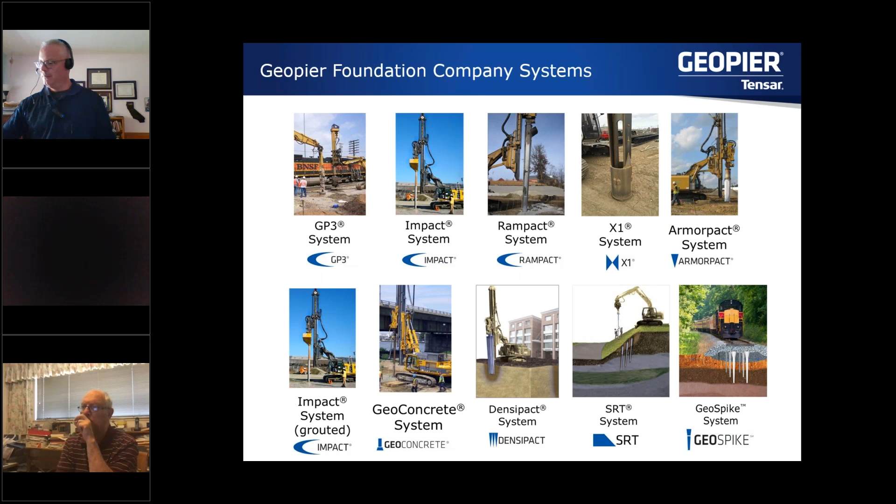All right, thank you very much, Adam. We have only a few questions that have come in during the presentation, but as you get to answering, we might have more. Ron Lutzenheiser actually asked, how deep do the plate piles have to be installed, and is there a typical depth below a slide plane, or ratio of length above the slide plane versus below the slide plane?

That's a sort of general guidance. So it all depends - it's a great question, but it all depends on the strength, or the lack of strength, of the sliding soil versus the resisting strength of the soil below. So for example, if we had a soft rock situation, we wouldn't need to get into it very deep at all. If we only had, say, a 4 or 5 foot slide, maybe just a few feet into that rock would be enough to stitch that slope together.

If the resisting soil beneath is only marginally better than the sliding soil, then we're gonna have to go a lot deeper to make sure we get those things, because remember, we've got to deflect these things. We don't want them fence posting too much. So if we have to deflect them, we may have to go deeper just to get the reaction we need to make that mechanism work. Hopefully that answers his question.